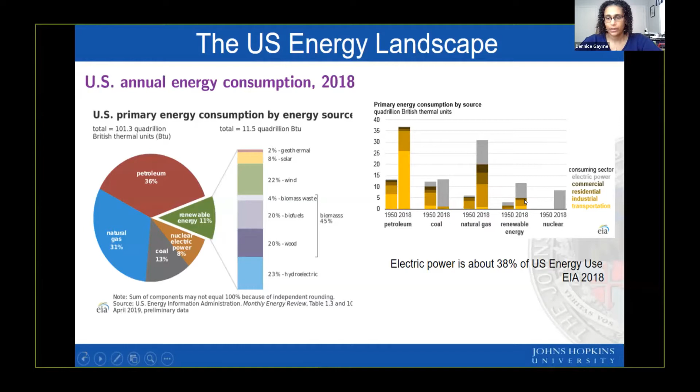And in fact, renewable energy is really rapidly growing. Renewables were the largest capacity additions in 2019. They were also the largest capacity additions in 2015 and previous years. So they're growing at a rapid rate in the US. Wind was about 46% of that, at least planned in 2019, solar about 18%, and then some lower numbers were the natural gas, which is also continuing to grow. But this is in comparison with retirements of things like coal and older types of natural gas and nuclear energy.

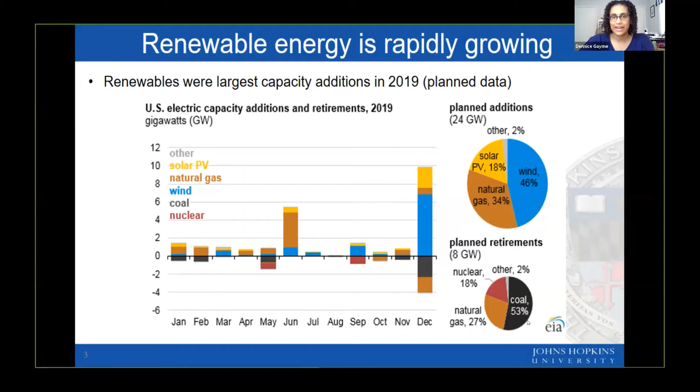So this is a really great picture if you care about sustainability, because you can see that these sustainable sources are really growing. But as you often hear, there are some major challenges associated with solar and wind, which, as I just showed, are some of the largest sources of renewable energy. And you often hear the words variable, intermittent, and uncertain associated with these, and this is really what people mean when they say that.

If you take a look here at the top left, you can see a plot of wind energy output for a wind farm in California. This is in Tehachapi. Every line here represents 1 day of wind farm power output data. Some days you get very constant wind power output. Other days you get very little output, but in many days you get these precipitous drops that happen very suddenly. And if you look at the average power output over the month, this blue line towards the bottom, you can see that it in fact is not very connected to what you see on a daily basis.

Similarly with solar, if you look on the right here, you can see a clear day. This is some solar data from Germany. You get a very well-defined peak in the middle of the day when there's a lot of sunshine. On a cloudy day, you don't get a lot of solar energy. But most days, especially if you live in Baltimore, are very variable. Half an hour, you can see lots of sun, 20 minutes later it's pouring, or at least that's my experience of Baltimore. So you really can't predict that. You get a lot of variability. It's very intermittent. It cuts in and out, and it's uncertain because the forecasting technology is only so good.

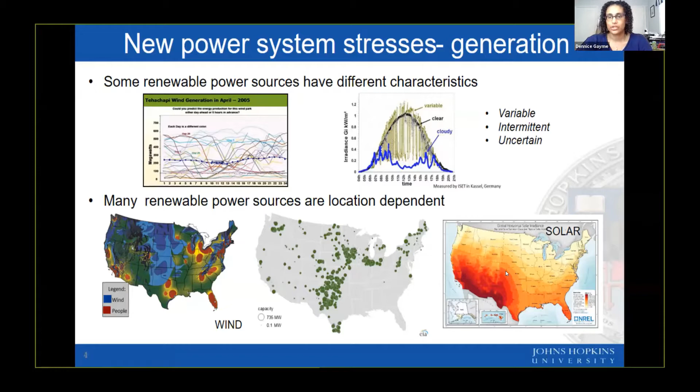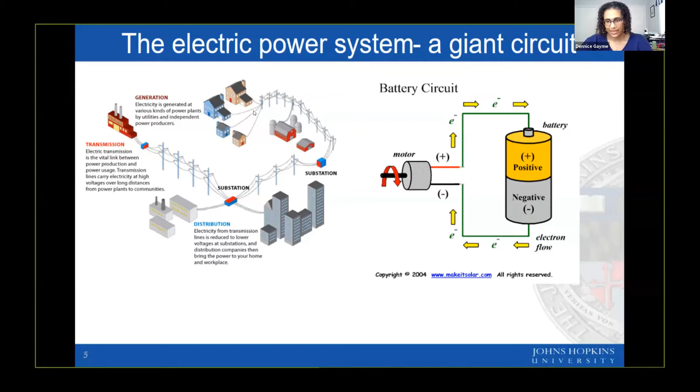So say this may be a factory here, you may have a city, and you may go all the way down to residential areas. You can think of that generator as this battery, and the electricity is flowing to these loads, which are the heating or air conditioning loads in these places, as well as lights and other things like that. And so because it's really a giant circuit, and that's exactly how one would model it, it needs to obey circuit laws. And so these circuit laws are laws of physics that govern the behavior.

And so in practice, what does that mean? Well, it really means that the generated power has to equal whatever the loads are, plus whatever losses you have in these transmission lines and other aspects at all times. And that's a very difficult problem to overcome when you have very intermittent or uncertain resources and you have variability in the system. So there's a lot of ways people have looked to overcome that, and that's one of the main focuses of my research.

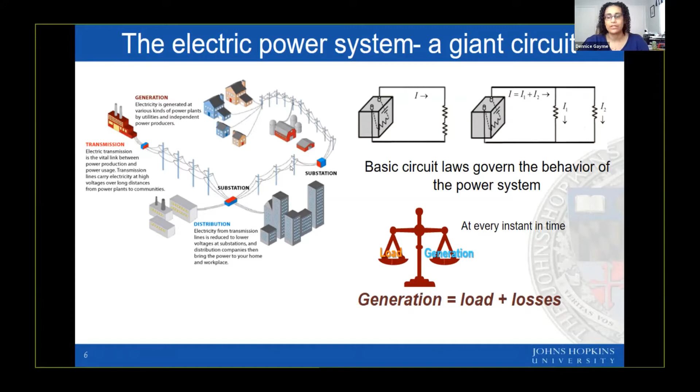So a very naive or static way of looking at this, and so this is a picture from about 15 years ago, where the idea was, well, typically in places you have a lot of wind at night, solar during the day. You can balance solar and wind sort of statically by thinking about having enough solar to balance the wind that you don't have in the middle of the day and enough wind to balance the solar that you don't have at night. And then you can build up an entirely 100% renewable power system by building in some high certainty renewable resources like geothermal, biomass, and small hydro.

So this is a picture from the California Independent System Operator, some work out of Stanford that looked and said, well, you can actually, if you have the right mix of resources, track a demand that looks like the top of the signal here. But in order to do that, you need really good resources for forecasting on both the supply and demand side. And this idea of forecasting on the supply side is very difficult because of forecasting the weather and the resources, but it's also difficult on the demand side because you have customer behavior that's coming into this.

You have electric vehicles, which are changing load patterns in various places, and you even have demand response or load management programs, which allow people to adjust their electricity use based on current prices, that are also changing some of the load patterns. So this type of static forecasting can be very difficult, but there is a lot of research that is improving these things every day.

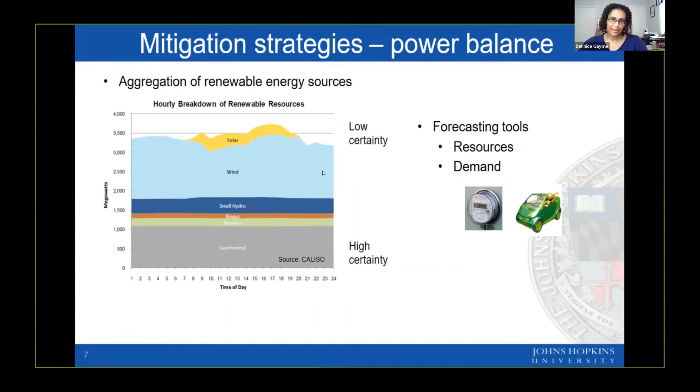So one of the things that I focus on in my research is adding additional flexibility. So one way, and the way that's most often discussed, is adding grid integrated storage. So if you think of this system, you can add storage either near the generation, so you can combine storage with a wind farm, or you can put storage near the load. And typically you put storage near the load because you can think of maybe at night you have a lot of wind power, you want to get it close to the load for the peak demand time, when maybe you don't have as much transmission capacity to get it from one side where it's generated to the other. So you have the storage closest to the load. It eases congestion in that way.

And storage comes in a lot of forms. It's not just the batteries, the lithium-ion batteries that we think of. You can also have pumped hydro, which is actually a source of storage that's very popular in Europe because there's a lot of mountains. So you have a lot of grids in Europe that are balanced because of the Alps, and trading power that way. You have short-term storage from mechanical things such as flywheels that can be spinning and take up short-term imbalances. Solar thermal energy actually uses thermal storage. So there's various types of storage that we can use in the system.

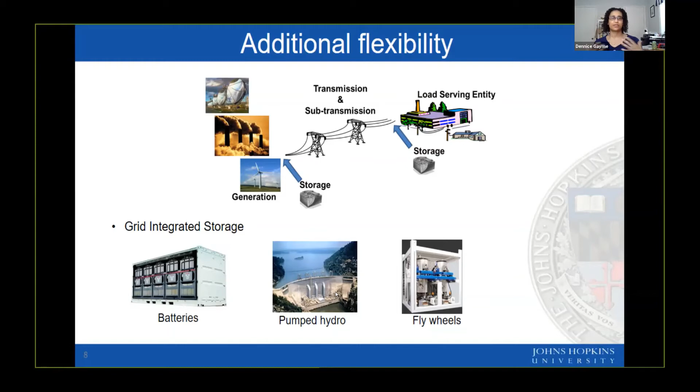Another way to add flexibility is aggregating small resources. So this is another area that we work on where we try and take things like electric vehicles, residential PV solar cells, maybe a Tesla Powerwall or something that people have at home, air conditioning loads, hot water heaters, smart refrigerators, and aggregate them into what we call virtual batteries. So you get this large source of flexibility by aggregating all these resources.

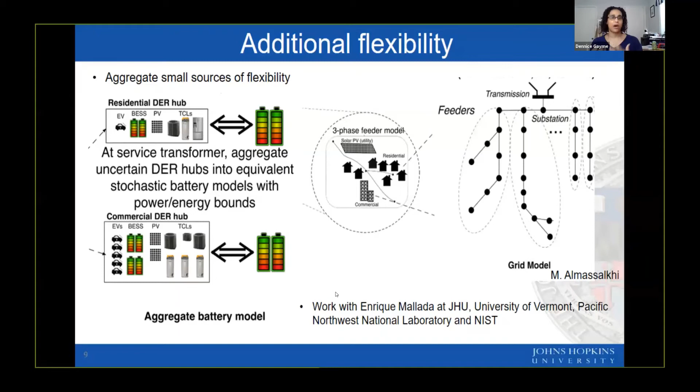There's benefits in this aggregation, not only because you have a larger resource, but also because now you have added privacy. It's not that I know I'm controlling X person's water heater, I'm controlling a large group of water heaters. So it gets rid of some of the privacy aspects of controlling small DERs. And then you can build those up and use these small aggregated, flexible battery resources all through some sort of feeder system, and then use them as larger resources in your energy grid. So that's another way that you can do that, but you need good sources of models and control in order to do that. The other thing you can do is think about controlling the resource directly.

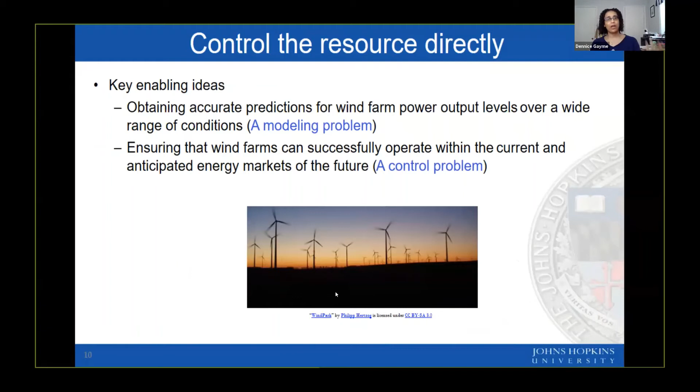So in a situation where you maybe have better forecasting technology for something like wind, you can start to think about obtaining accurate predictions for the wind farm power output over some range of conditions, either short or long term, depending on how good your forecast is and for how long it goes. And then also having wind farms, because they're quite large, participate in some of the energy markets that you have.

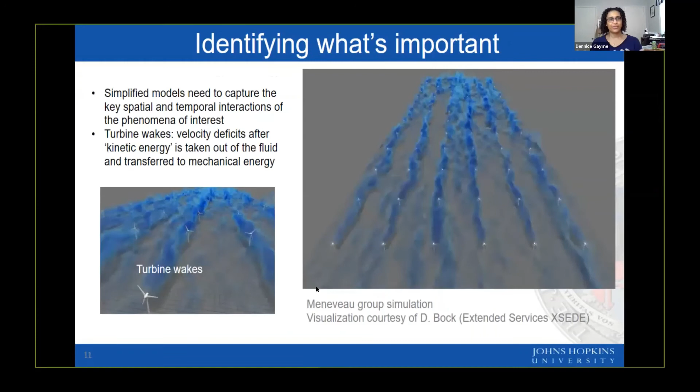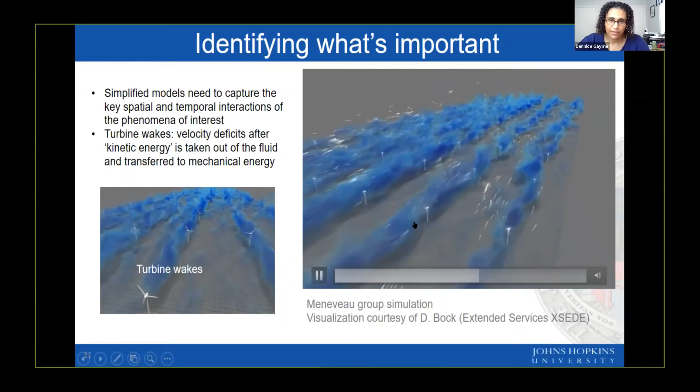And how do we do that? Well, we do that by looking at what's important in creating small reduced order models of these systems. So if you look at this simulation, oh, that didn't work. So if you think about this, you can look at a wind farm. And so this is a wind farm that's being simulated by my collaborator's group, Professor Meneveau, where we're looking at these blue areas behind the turbines, which are the wake regions or the reduced velocity fluid that comes after you suck the kinetic energy out of the wind to get the power out of it.

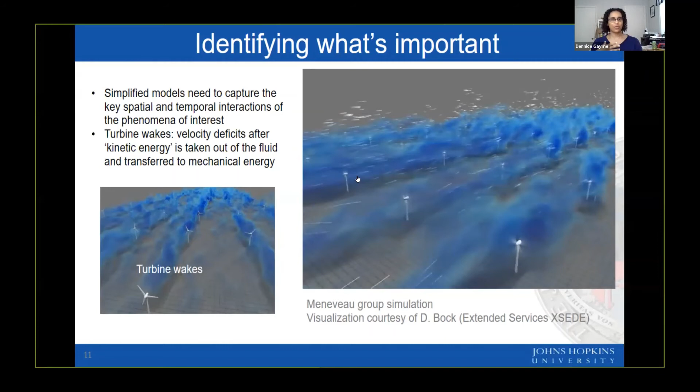And what we look at modeling is how these wakes grow, develop, and interact with one another. And if you do that, you can get a better sense of how much power potential you have in a farm. And you can also move these wakes around a little bit by controlling the amount of power you take out at one location versus another in these large farms in order to do things that help the grid.

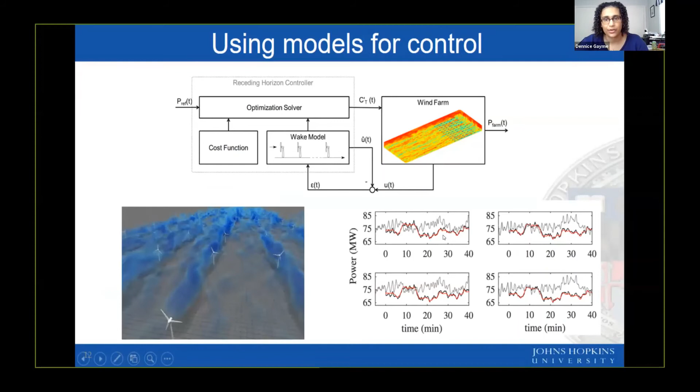So if we then model this complicated system, we can do things short term like power tracking. So this is showing a power tracking signal that's used to create the supply-demand balance on the grid. So this signal is in red, and in black is how we're tracking the signal. And the gray shows what would have happened if we didn't control the wind farm. So on a short-term basis, by using these advanced controls and models of the wind farm, we can actually use the wind farm that was leading to variability to help reduce the variability in the system. But of course, this does require good forecasting.

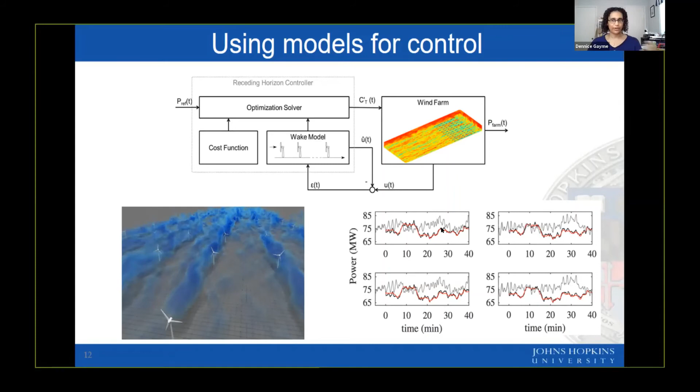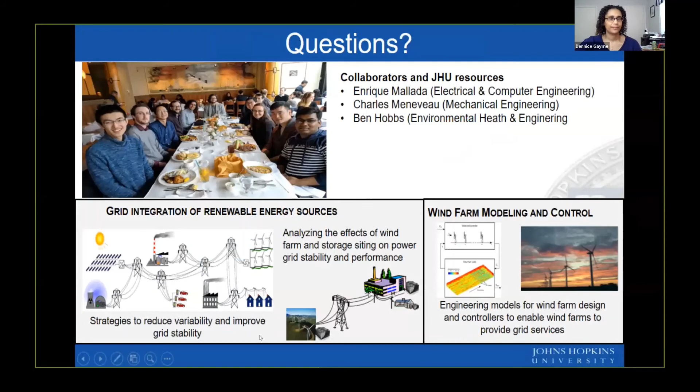So, Dennice, we'd love to get your thoughts on how optimistic you are that technology will help us to meet the global greenhouse gas reduction targets in the years ahead. So especially in the not too distant future, what's coming out soon versus 10, 15, 20 years out? So the types of technology I work on are more at the level of control and aggregation. And I think we need a variety of both types of technology. So we need better wind turbines, we need better solar PV cells like Susanna makes, but we also need ways to integrate and control them.

So I think there's been a lot of really good research showing that it's really possible to integrate more and more of these renewable sources if people are willing to invest in the technology and the research before they build these things. So one of the things that happened with wind farms is that people built a lot of wind farms, were really excited about the technology, and then later found out that there could have been better ways to do it. And so they ended up not getting as much power out of these wind farms as they expected, which led to this underperformance problem, which was really just a building-something-before-you-understood-how-it-worked problem. And so I think we really need to put the research in order to do this right, in order for these things to really take off.